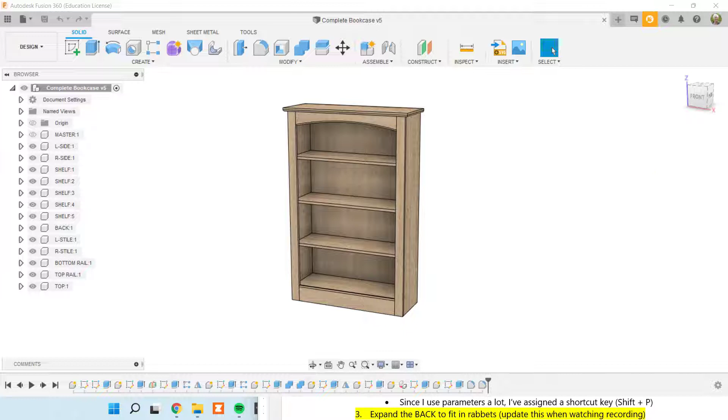So I've opened up the finished project here to demonstrate what we're going to be creating. This was based on our basic bookcase, but what we're going to do in this video is add two of these vertical members called stiles. We're going to add two horizontal trim pieces called rails, and a top. And you can see that the top has a nice round over to it. It's flush to the back. The top rail also has a nice round over to it, as well as the bottom rail.

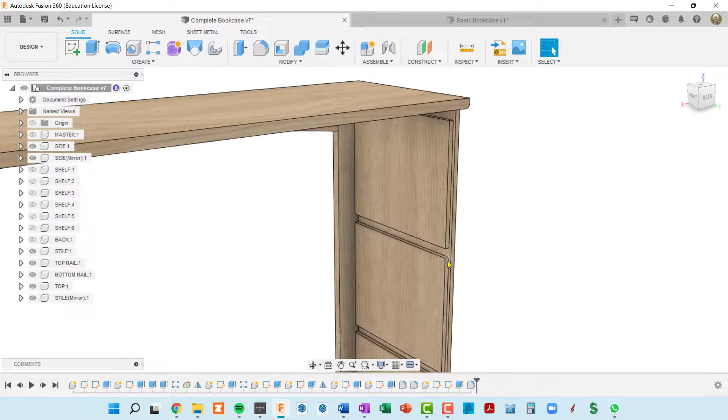So that dresses up our basic bookcase, but another thing we're going to add is joinery. If I hide all of the shelves here, you can see that there are dados cut in the side panels to accommodate the shelves. And if I hide the back component, you'll also see that there's a rabbet cut on the edge here so that the back piece will sit in flush with the back of the cabinet.

So we're going to start by opening up the basic bookcase from the previous video, and here it is. You can see it is pretty basic. If I hide any of these shelves, you can see that there's no joinery. The shelves are just butted into the side and butted into the back. The sides have no joinery for the back, so very basic. But we're going to add that joinery in, and we're also going to add these trim pieces and a top.

So let's just confirm that we still have a correctly functioning parametric bookcase. I'm going to press Shift-P to pop up my parameters dialog box. Just to review, if you go to Modify, Change Parameters, you will pop up the dialog box. But I've set this to Shift-P. If you want to do the same thing, click on these three vertical dots, a little menu will pop up, go to change keyboard shortcut, type the keyboard combination you want and press OK. I like to use Shift along with a single letter. It usually does not collide with Fusion's built-in shortcuts.

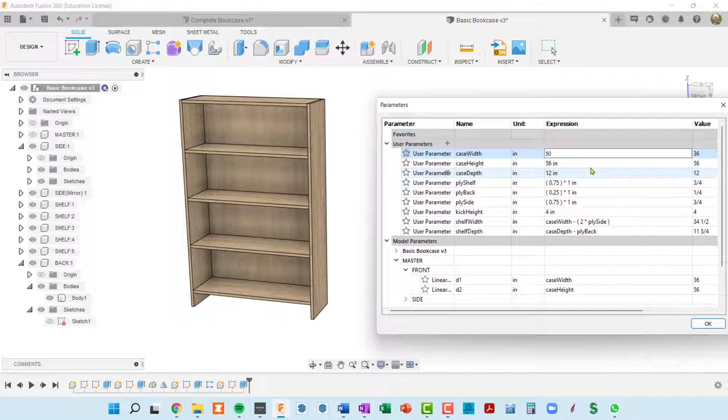Okay, so we're in the parameters, and these three, remember, were the case width, height, and depth, basically the overall outside dimensions of the case. I'm going to type in 50 for the case width, press enter, and you can see that all of the shelves got wider, the back got wider. For the height, I'll type in 80 and press enter. The height changed, and the shelves change their position. They're still equally spaced. And if we change the depth to 18 inches, the bookcase got deeper. Okay, so we're in good shape. I'm going to set those back to the proportions we started with, 36, 56, and 12.

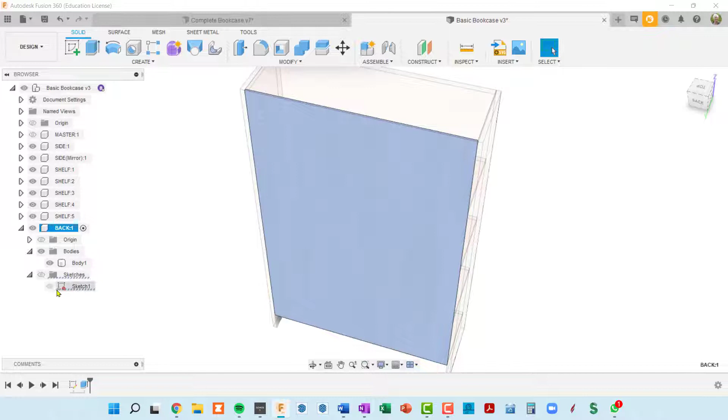So next I'm going to cut two rabbets, one on each side, to accept the back. I think the easiest way to do this is expand the back in width and then use the back as a cutting tool to cut into each of these two sides. If we want to change the size of anything that we've extruded, we want to go back to the sketch that defines it and change the dimensions of that sketch. So I'm going to activate our back component, open it up, and go down to our sketches.

I'm going to turn on our sketches and take a look at what we've got. If we hide the body, we can now see the sketch as this black outline. And there's also a black point right here. That is where the sketch is basically anchored down. We specifically anchored it to the inside back edge of the side piece of the bookcase.

So we're going to have to change that because we want this back to overlap 50%, half of the plywood thickness. And we want to change the width of it. So we found its sketch right here. We're going to right click on that sketch and then edit. And so now we see how the sketch was defined.

There are 2 dimensions. I'm just going to click on that and neaten it up a little bit. But let's hover over this and we can see how this is defined. This was defined as case width minus 2 times the side ply thickness. So basically the case width, which is 36 right now, minus twice the plywood, so minus 1.5 inches. That gives us our 34.5 with our current setting.

But since this has an FX, it's a formula. When we change any of those parameters involved in our parameters dialog box, the sketch will automatically change and thereby change the 3D body. The height is going to stay the same. The height is going to be our case height minus the kick height. So our kick height is this distance up to the first shelf. So that's fine, but this dimension is going to have to change.

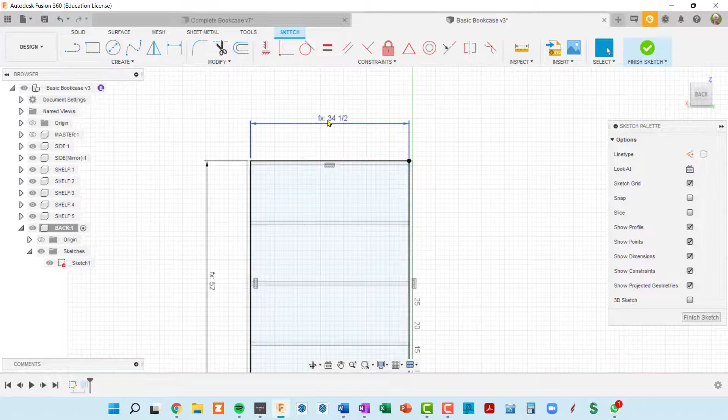Now, if we look at the sketch, we can see that it's all black. And if I try to move any piece of this, or if I double click to get the entire rectangle and try to move it, I can't. So how do I get it over to this point right here? That's the question. Well, the reason that this dot is black is it has coincident constraints. So when I hover over that dot, you'll see these 2 little icons appear.

If you don't know what these constraints are in a sketch, just click on that and look in the lower right corner and it says coincident constraint. Now there's 2 of them here because I think we've got 2 lines that each have an endpoint that coincide, and then there's a second coincidence saying those 2 points also coincide with the inside top of this side piece. So we want to get rid of that coincidence because that is preventing us from moving this sketch around.

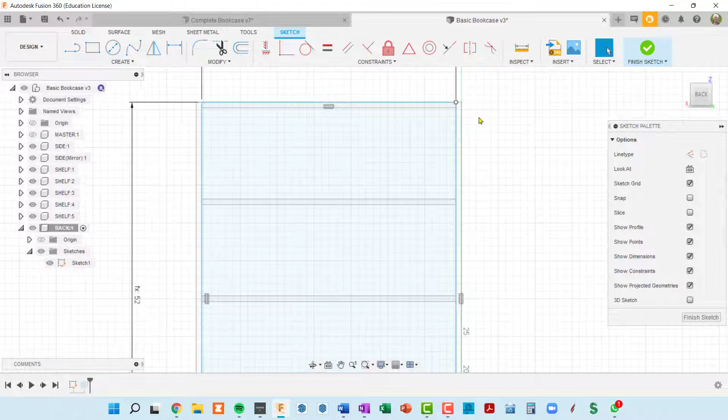So if I right click on this line or right click on this line, either one, I can go down to the pop-up menu and select delete coincidence. Let me do that again over here, delete coincidence. So I did it actually on both lines. And now when I hover over this point, there is no coincidence.

So now what's going to happen if I double click on this, selecting the entire rectangle, and start to move it? Well, something weird is kind of happening here. I can only move it in a certain direction, kind of spinning around this point. And that's because I have a dimension set from this point to this other edge. So basically we want to get rid of that point and we want to get rid of this dimension. We're going to redo this width anyway.

So I'm going to click on that dimension and hit my delete key. And I'm also going to get rid of this point. So I'm going to drag through it from left to right. The point gets highlighted, I press delete, and that's gone. So now I can double click on this rectangle and move it around. Now I want to show you that I've also lost the coincidence between these 2 lines. So if I just drag one of these lines, it's going to move away from the first point.

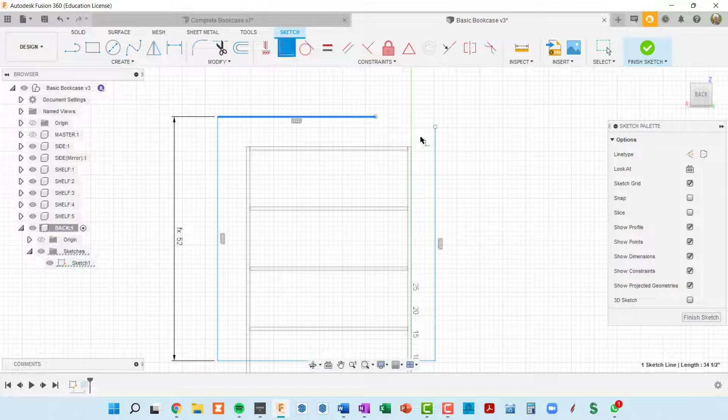So let's go ahead and reestablish a coincidence between these 2 points. So I'm going to use my coincident constraint here. And I'm going to click on one point and then click on the second point. That didn't work, so I'm going to click the second point first. There we go. And then the first one. Sometimes it's a matter of getting the order correct.

So now you're seeing that the width is really nowhere near what it was before, but we still have a correct height. And if you notice closely on the cursor, I'm still in the coincident constraint mode. So I'm going to hit escape. My pointer goes back to the standard pointer.

And now I want to put a dimension on the top of this rectangle. It's actually going to be the width. So I hit D for dimension and click on this line and then move away from it. Click again, and now I can enter my dimension.

So we know that this is going to be less than case width, and we know that we want this plywood back to be inset halfway into each side. So that's really, half a side plus half a side equals the thickness of one side.

So if we type in case, and then we can pick case width out of our parameters, and then say minus, and then type in ply, and we've got our ply side, which is the thickness of our side, and then press enter. So now we get 35.25, and knowing that this is 36, that sounds right, in that if we add 3/4 of an inch, our current plywood thickness, we'd get 36. We'd get the full case width.

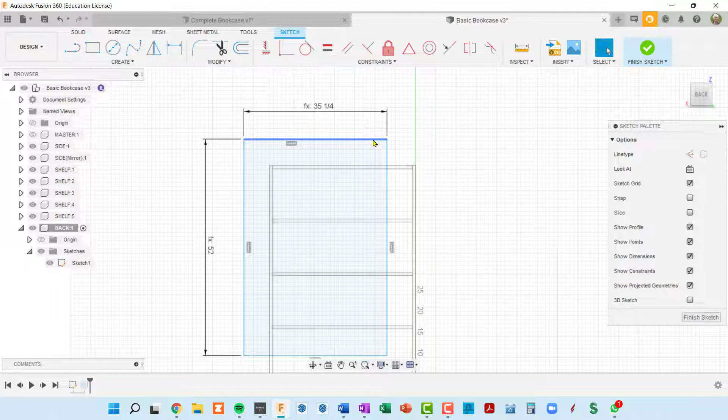Okay, so now I'm in dimension mode, so I'm going to hit escape. I can click on any of these lines and move this entire rectangle. Or I can click on this point and move it. So where I want to position this is actually halfway on this line. And when I try to do that, oh, I actually can snap. I thought I couldn't, but this is good.

So I'm moving this point, and you can see a little triangle pops up. That's a midpoint constraint. I'll move away from there and zoom in a little bit more so you can see it. So when I drag this point, hover over this line, I've got my left mouse down so I can continue to drag. When I see that midpoint constraint, I can just release.

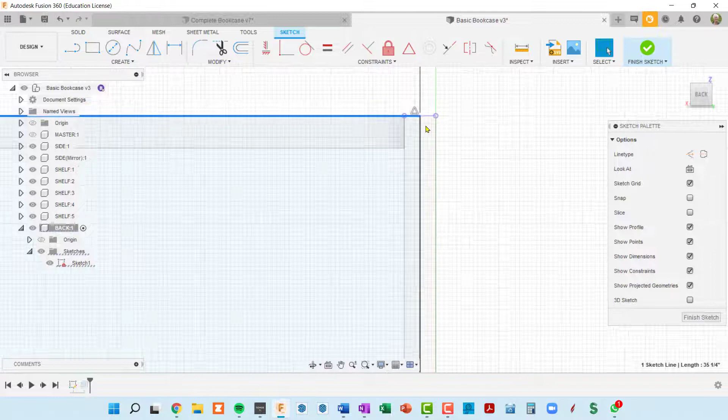And now, magically, all of the lines in this sketch just went black, which means this sketch again is fully constrained, which is what we want. Now if I try to move it, I can't. So it is coincident with the midpoint of the side piece of plywood. So now that's going to define the new size of our back. So all I have to do is finish the sketch, which I can do here or here.

Now let us take a look at the body that we had previously hidden. I'm going to turn it back on. And now you can see that the plywood back extends half into the plywood side and half into the other plywood side. So that's perfect.

So we're going to hide our back sketches, collapse our back component up, and now let's go to the top level component, deselect everything, and now we can see, well, the back is the proper size, but the two sides do not have a rabbet. They do not have a groove to accept the new size of the back. So we can actually use components as cutting tools in Fusion. So that's very convenient. That is actually part of the combine command.

So if I go to the modify menu and I pick combine, I get this dialog box that's asking me, what is your target body? So basically it's saying, what do you want to cut? So I'm going to hover over this side and click there, and it shows as one selected. Then my blue selection goes to the next thing in the dialog box, and it's saying, what are your tool bodies? So in this case, we're going to use this back as the tool, and it's going to cut into the side. So I'm going to click on the back.

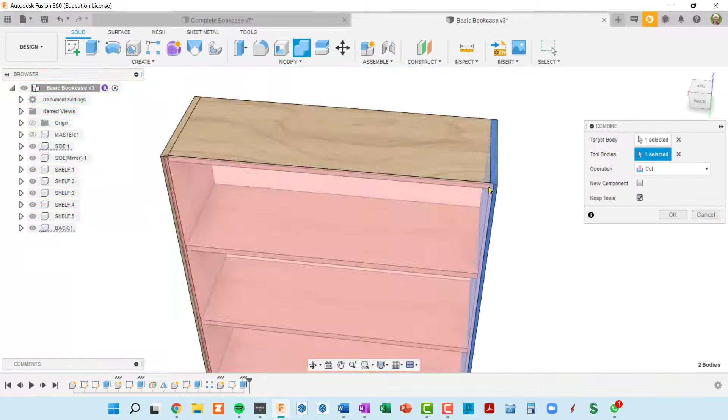I want to make sure I'm in cut mode. And this check mark is very important. It says keep tools. Well, our tool is our back. If I didn't have this checked, this back component would go away. It would actually delete as part of this operation. So we're seeing a preview. The red is representing where it's cutting, and it's actually cutting into this side. So I'm going to click on OK.

And now you can see we don't have that overlap anymore. And if I hide the back component and show the back component, you can see that there's a rabbet cut that this fits perfectly into. Now, we have to do the same on the other side. So you can actually repeat the last command in Fusion by right-clicking, and then repeat whatever the command is will be right here. So I'm going to pick combine.

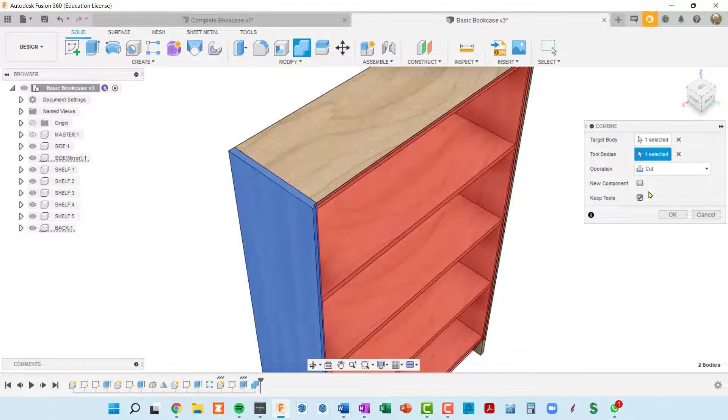I get my combine dialog box up again. Now I'm going to select my new target body, which is this side. I click there. My tool body is the same. It's this back. So I click there. I want to make sure I'm in cut mode and keep tools and OK. And now I have cut that other side rabbet.

So now when we hide the back, you can see we have a rabbet going all the way down to the end here. It didn't go farther because that was the height of our back. So that was cut perfectly by Fusion.

Next, we're going to make the dados to hold the shelves. To do that, we'll start by making one dado in one of the sides and then use a rectangular pattern to reproduce that dado for all of the shelves. And then we're going to do all of that work so it gets mirrored to the other side.

So I'm going to turn the back component back on, and remember that we have two sides here and that they are mirrored. We have side one and another one that says side one mirror. I'm going to click on that side one mirror and rename it R-side for right side, and then do the same for the other side and call that the left side, L-side. So now we know those are really two unique components.

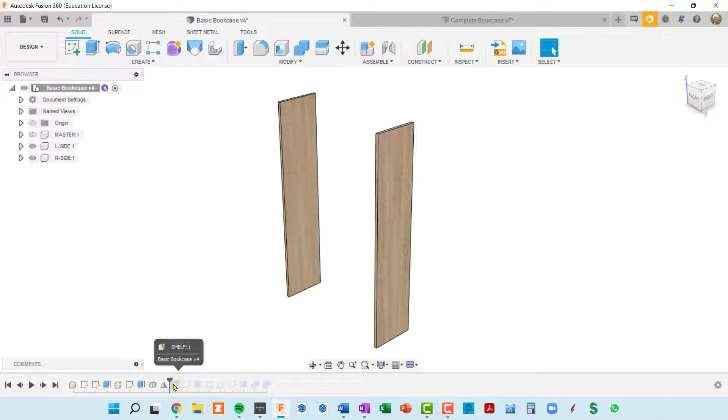It created the second side. So if we go back in time before that second side got created and work on this side component, for instance cutting the dados, then those dados will automatically appear on the other side. So let's leave our timeline in the proper position here, and then we can activate our left side and start working on it.

I'm going to open up this left side component in the browser, and I can see I have a single sketch and that it's hidden. So I'll unhide that and just hide the bodies so I can see the sketch. The sketch is basically the outline of the entire piece. So I'm going to make another sketch, and I'll actually make it on the inside here so we can extrude inward and cut the dado.

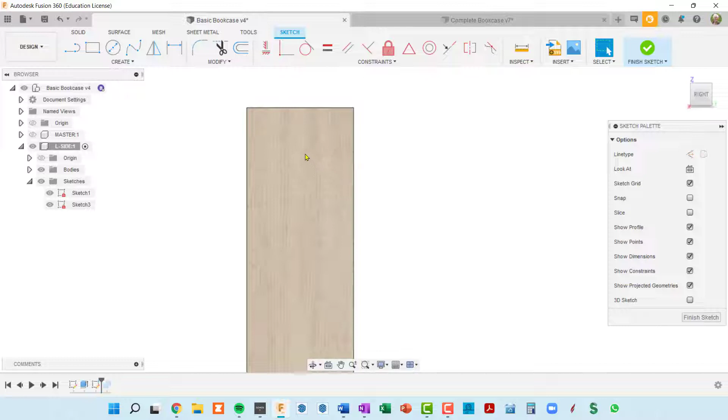So I'm going to go up to Create Sketch. I'm going to click on the inside of this left shelf. Fusion's going to pan so that we're looking straight at it. And now I'm going to get my rectangle tool, so I can either press R or click on the 2-point rectangle here on the toolbar.

I'm going to purposely snap to the upper left corner here and click, then move down towards the lower right corner. Instead of actually snapping to this right corner—you'll see that I'll get a dimension of 12—I don't want it to snap there because that's going to make a coincidence. So I'm actually going to make sort of a temporary rectangle somewhere in between and click. It's not the proper height and it's not the proper width, but it doesn't have a coincidence here.

So I'll show you that. If I hit escape, I'm back in my regular selection here, and I can drag this line this way and drag this line this way, but I cannot drag either of these, the left or top line, because they are coincident to the upper left corner because I intersected that corner when starting to draw the rectangle.

And in fact, as I hover over this point, you will see—if I actually click on the point—you'll see these two coincident constraints being shown on the screen, basically saying the point of this line is coincident with the end point of that line, and both of those points are coincident to the corner of this shelf.

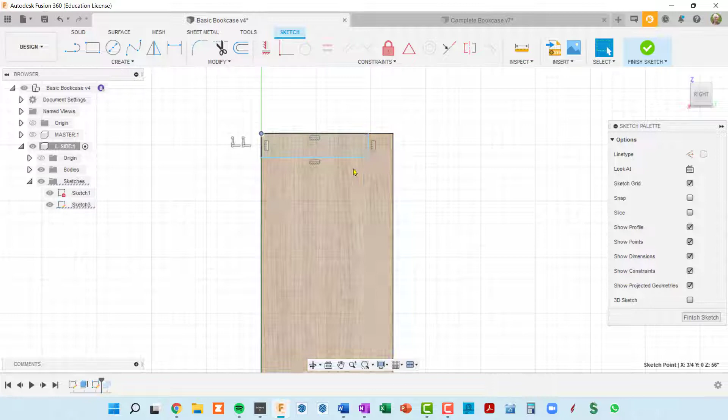So that's good. As this shelf grows, when we change our parameters, it's based here and then it'll grow towards the right. So to finalize this sketch, we basically need to put two dimensions in.

I'm going to hit D for dimension and click on the bottom line—well, that's not the dimension I want. Let me hit escape. I'm going to click on this line, press D, and drag down. Okay, so there's the dimension I want. I can bring it up here so you can see it a little bit easier.

And click. Now, we know that this shelf is the full depth of our case, so I'm going to say okay, we're going to start with case depth, which is our parameter. I can just start typing in case D, and Fusion shows me all of the parameters that match that. I'm going to click on case depth.

But I don't want to go all the way here. I want to stop this dado before we hit the back. So the thickness of our back piece is going to be subtracted from our overall width, and that's our ply back. I typed in ply, I get three of these ply parameters. I'm going to click on ply back and then press enter. It takes Fusion a second, but it calculated that.

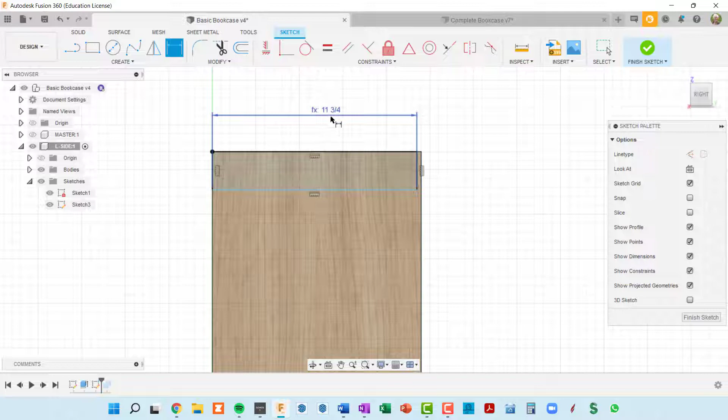So currently our case depth is 12 inches. It subtracted the current back thickness, which was a quarter inch, and we get 11 3/4. But the FX is showing that it's a function, and this will change when we change our parameters. So that's exactly what we want.

So now I want to put a vertical dimension on either of these lines. I'm going to press D for dimension, click on this line, drag it out to the side, click again, and now I'm going to type in—this is a plywood thickness, and this is a shelf—so I'm going to type in ply, and then click on shelf, and press enter. Okay, so that's all we need.

That is a closed profile that we will be able to cut into that piece. So I'm going to finish my sketch, and let's see, when we hover over this, if I zoom in enough, you can see I've got a profile that I can actually extrude.

So if I go up to my extrude command, hover over this profile and click, now the arrow is pointing back towards me and I want to go in the opposite direction. So I realize that when I type in a value here for the distance, it's going to be a negative value. So if I start pushing this backward, Fusion is smart enough to say okay, you're cutting this surface—it automatically set this operation for us. But if not, you want to make sure that's set to cut.

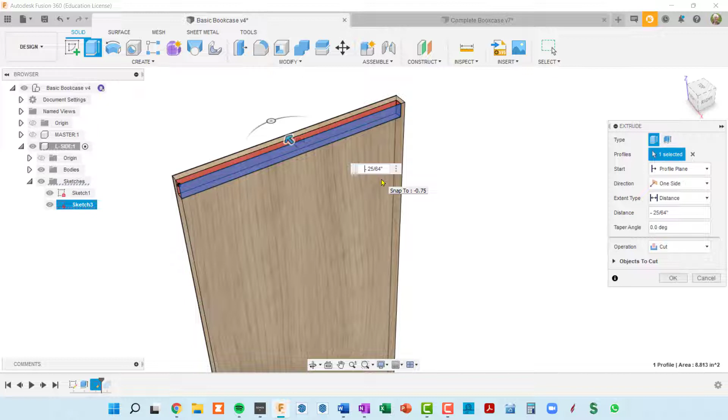Now I want to type in a distance, and the distance that I want for these dados is half the thickness of the piece of plywood that we're cutting into. So I'm going to type in minus and then ply side, and then get rid of this extra dimension that was in there. So my thickness is minus ply side—well, that's the entire thickness, and I want half of that. So I'm going to type in a slash, which means divide, and then 2.

So now we're looking at our preview. That cut is half the thickness of the side, the thickness of the plywood side. So that looks good, I'm going to press enter, and that finalized our extrusion.

Now this little piece right here is going to get cut by the operation we already did, but it's not there because we went back in time so that we could get all of these dados mirrored. So don't worry about that—that should handle itself. Once we scrub the timeline back to the end, this part will get cut, and it will get cut to the same depth as the dado is.

Okay, so now I think what we should do is make sure that dado is appearing on the other side. But remember, we're back in time, so let's go back to activating our top component, and I'll just click away here, and let's see where we are on the overall timeline. We are before the mirror command. So if I just scrub this one to the right, you'll see that the mirrored component is created and it has a dado in it.

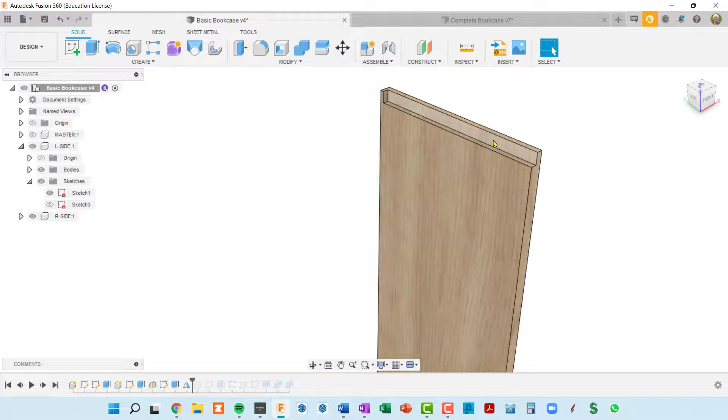So that's the trick: go back before the mirrored piece was created, and it will have everything in it that the original piece has. Let's rewind the timeline, because now we're going to reproduce this dado and make one for each shelf.

We could change that sketch and put dados in all the way along here, but there's a much easier way. We could create a rectangular pattern within the sketch, going back and editing it so each rectangle representing a dado patterns down the piece. But there's actually a better way still.

We're going to go to Create, down to Pattern, and pick Rectangular Pattern. The interesting thing is you can use features here. In this case our extrusion is the feature, so we're creating a pattern of features, not faces, bodies, or components, in order to reproduce our dado.

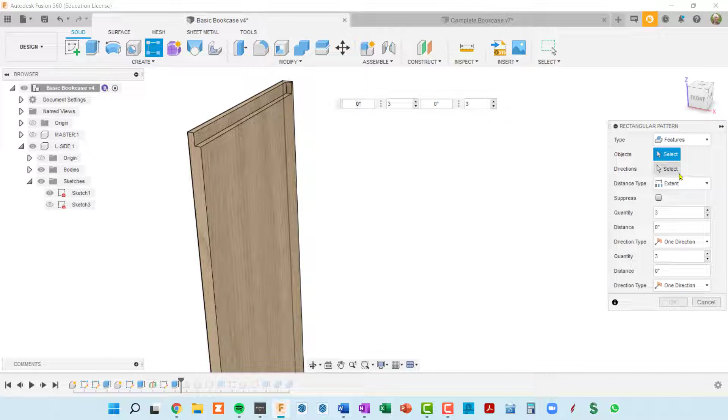Now it's asking us to select the object we want to reproduce—that's this feature in the timeline, so I'll click on it. Then we need the direction to move in, which is down the length of this side piece. I'll click on direction in the dialog box, then click any line going in that direction—doesn't matter which one, it's just establishing a direction.

Now it's downward, which is great. We know we have 4 shelves plus the top shelf, so really 5 shelves total. I'll put 5 in here, which also appears in the quantity field.

Then we need to select a distance type. There are two settings: spacing, where we'd set a distance between shelves, or extent. We want extent, because we want the 5 shelves to go down to our kick plate and evenly space themselves. So we're in extent, and our quantity is set.

Now we just need to establish the distance we're moving. As I drag this down, you'll see the 5 dados—the first one and the new 4—being reproduced. But we have to establish the overall distance to drive this bottom dado down, and that's what this number represents here, and the same number over here.

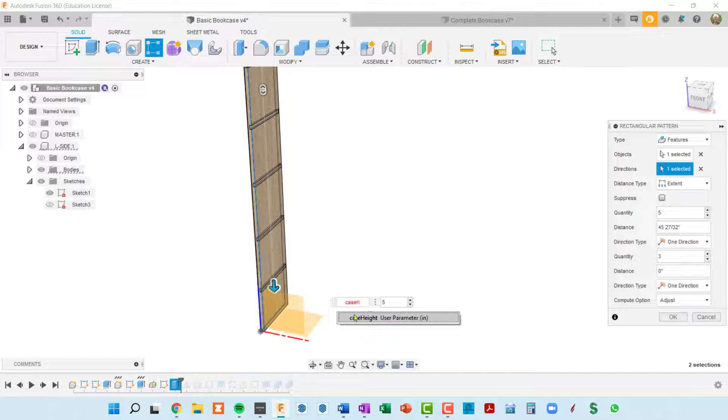So if we type in our case height—there's our parameter, so I can just click on it—we're just previewing here, I haven't hit OK yet, but you can see where the last dado appears. And it actually appears beyond the shelf, so that's obviously too much.

So we want to subtract the kick height from that. Here's the kick height—I'll click on it and see if that's proper. I'll press enter, knowing we can always come back to this rectangular pattern feature and edit it. If I click on this line and look in the lower corner, I get 3 1/4.

Now let's pop up our parameters with Shift P and see what our kick is set to. Our kick height is set to 4 inches currently. So we want that dado to come up by 3/4 of an inch, which is the thickness of the shelf—so we need to also subtract the thickness of the shelf.

So I'll go down to our rectangular pattern in the timeline, right click, edit the feature, and go to our distance calculation. Let me expand this dialog box so you can see the entire formula. Case height brought us down beyond the case, kick height brought us back by our kick dimension, but we also need to come backwards by the plywood thickness of a shelf. So the entire distance calculation is case height minus kick height minus the thickness of the shelf.

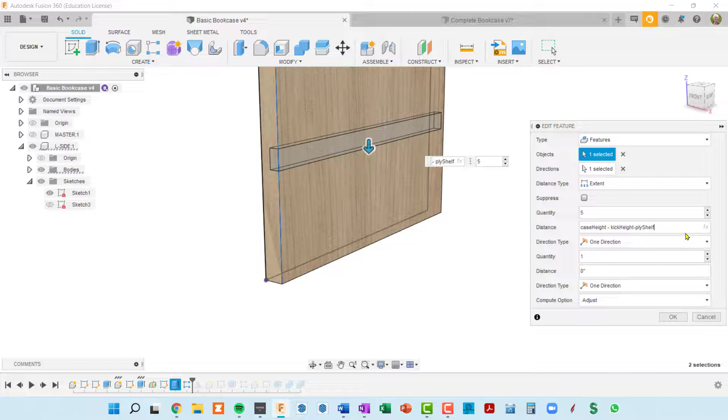If I press enter now and OK in this dialog box, let's measure this again. I'll click on this, and now it says 4 inches, which is indeed our kick height. That's perfect, and it should match where our shelves were reproduced. We want to check that, and also check that all of these dados got into our mirrored side.

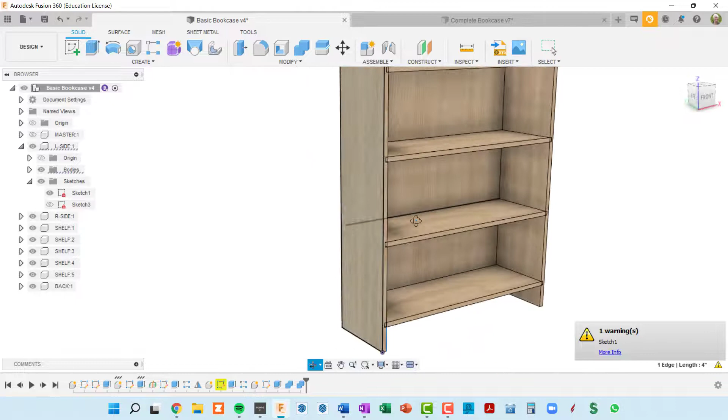So we can scrub the timeline to the right, and the mirrored component is now created, and it has all of the dados in it. Let's scrub our timeline all the way to the right, and we can see that our shelves are now created, and they do align to our dados perfectly, but the shelves are not wide enough because the shelves originally just butted into the two sides, and now we want to extend the shelves. So that's the next thing we'll do.

You may have noticed a warning popping up here in the lower right corner of the screen, and that corresponds to this yellow highlight of the sketch here in our timeline. So if I right click on that sketch, I can actually review the warning, and it says project reference failure, a project source is lost, cache used.

So what does that mean? Well, you can see actually a red dot here, and that red dot corresponds to what this projection warning is talking about. Basically, when we were positioning these shelves, we were positioning that on this inner line here and this line where those two lines intersect, which is no longer there because we cut away this dado.

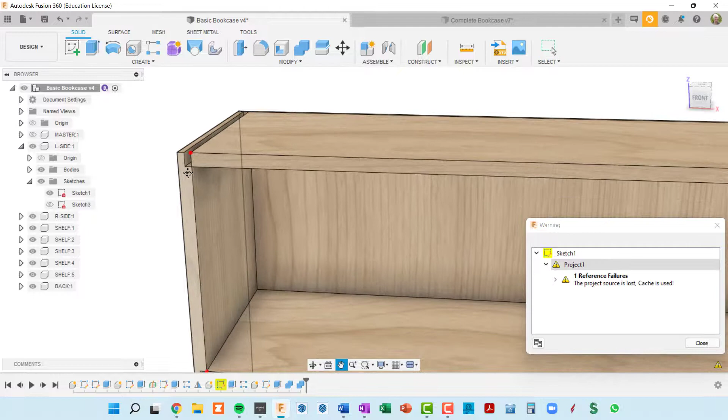So it's saying, well, you want your shelf to start at this point, but that point doesn't exist in the model anymore. So it's still working because it's using its built-in cache, knowing that this point used to exist. So it's a warning. We wouldn't technically have to fix it, but I like to fix those warnings because sometimes they do affect your model.

But it's also convenient that this is the next thing we need to do. We need to edit that shelf sketch and make those shelves wider. So we'll do both at the same time.

So this is our sketch. I can either get into it by right-clicking here and saying Edit Sketch, or going to one of the shelves. And remember, these shelves are all identical copies, so if I change any of these, they're all going to change. So I'll go into the first one, activate it, open it up in the browser, open up the sketches, turn the sketches on so that they're visible.

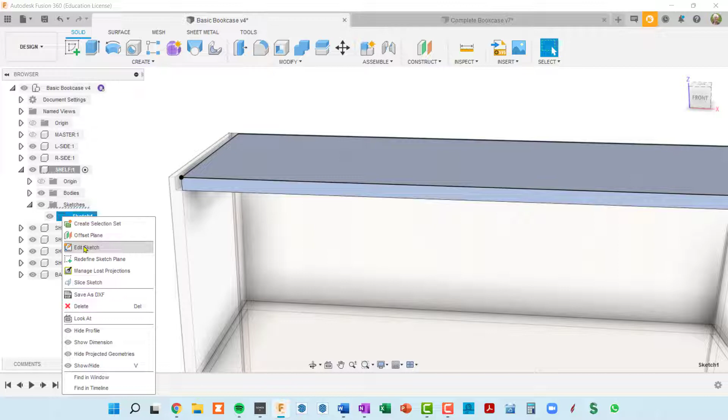Now technically I don't need to do that. If I right click and edit the sketch, it will become visible automatically. But I like to do it just to see beforehand, where does that sketch exist in 3D space? And you can see that it exists on the top of the shelf and that our extrusion pushed it down. You can also see where it is in relation to the side, and we need to change this sketch so that it now intersects with the corner of our dado.

So I'm going to right click on the sketch and go to Edit Sketch. And now let's take a look at it. First thing we notice is that all of the lines in the sketch are black, which means if I tried to move any of it, it won't move. And we can also see our side pieces here.

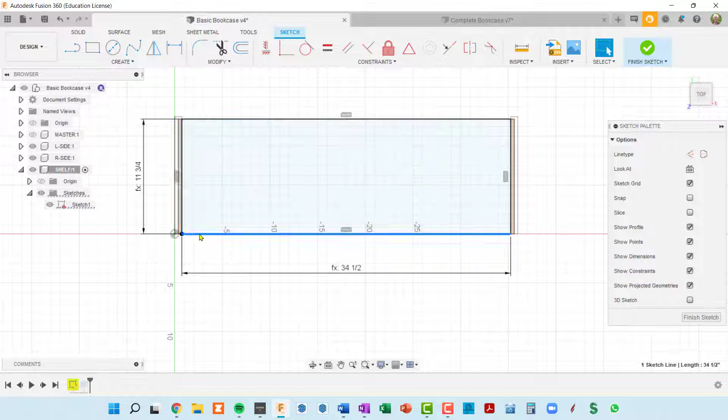All right, and we know that this is actually the dado, and we see a black point here with a couple of coincidences on it. So the two coincidences again will mean that the endpoint of this side is coincident with the endpoint of that side, and both of those are coincident with this point in space that's no longer there.

Let me go into 3D to show you that point in space that doesn't exist anymore. So we need to do some cleanup here, remove our coincidences, and actually remove that point in space to fix that error. So let's right click on the line and go down to delete coincidence, and let's right click on this line and delete coincidence.

So now we can see that our rectangle is blue, and if I double click on any of the lines in the rectangle, I still can't move it. And the reason for that is it's kind of locked to this projection point. So if I simply delete this dimension, I think we're going to be able to move the rectangle now.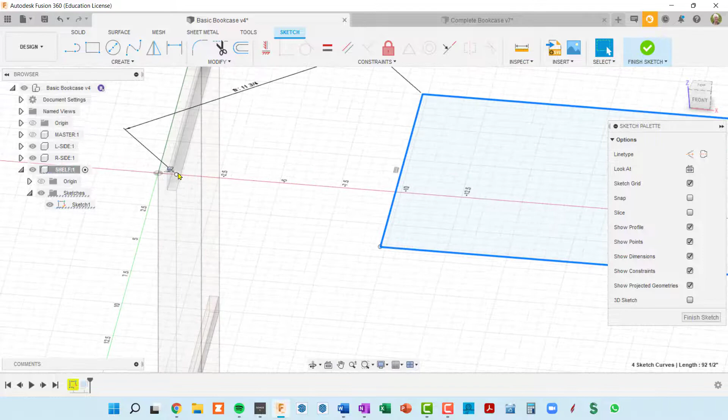So I'm going to double click to select all sides of the rectangle, and you see we can move it, but it's still linked to this dimension here, this projection point. So I'm going to remove this dimension. And this is the thing that's causing the error, this yellow projection point.

So I'm going to click on that and delete that. Okay, so now let's see if we can move this guy freely. And we can. So that's nice. And we're going to actually try to put it back here.

But before we do that, realize that the purpose of getting in here was to make this shelf wider. So we're going to change the dimensions. We're going to redimension this. Let's go ahead and look at it straight on the top. And let's put our two dimensions in. And then we're going to position the shelf back to where we need it.

Okay, so I'm going to hit D for dimension, and I'm going to click on this side. Now you see how two things are highlighted here? Because two things were highlighted, Fusion thinks that I want an angle between the two. So I'm going to actually click outside of here, make sure that nothing is highlighted, press D for dimension, click on this side, and then move out, click a second time.

Now this is our shelf depth. So this is the depth of the case less the thickness of the back. So I'm going to start typing in case, and here's our case depth, so I'll click on that, minus ply back, and press enter. So remember our case depth right now is 12, and the thickness of our back is 1/4 inch. So that's our 11 3/4.

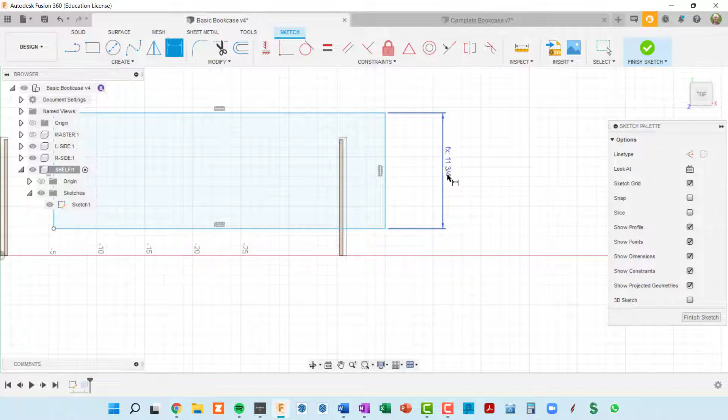But it's a function, so that means that when we change our parameters, that's going to update automatically, which is what we need for fully parametric design. Okay, so I'm still in the dimension tool. I can tell that because I've got a little horizontal double arrow next to my pointer. So I'm going to click on this line and then come up and click a second time.

Now this is the width of our shelf. So let's start with our case width, but it's not the full width of the case. It's into each of these plywood sides by half of the thickness of the plywood. So if we subtract 1 thickness of the plywood instead of 2, which is what it was before, we can get a proper width here. So I'm going to pick ply side and then press enter again.

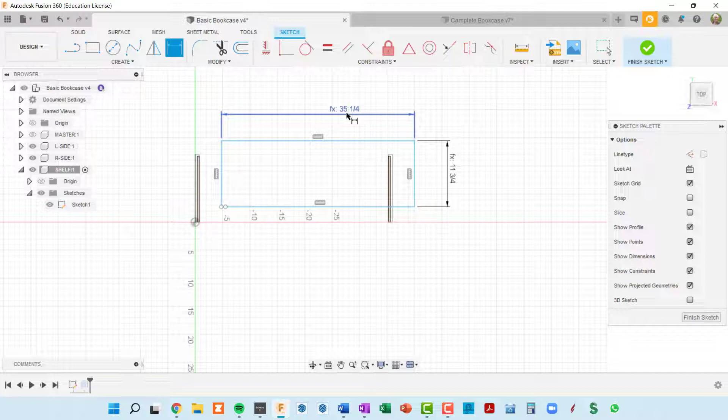So just doing a little calculation here, we know our plywood side thickness is 3/4 inch. We know our overall case was 36, so we're subtracting our 3/4 from 36 and we get 35 1/4. So I think our shelf sketch is now properly dimensioned, but I do see another issue here. Let me hit escape to get out of the dimension tool. When I hover over this, it's not a closed profile.

And the reason it's not is these 2 points do not coincide. This kind of got broken when we moved this sketch around. And remember, it was originally snapped to this point. So we're going to make this point coincident with this point. Now, when you have 2 points that can move, you click on the first one, that's the one that will not move. So there's a little saying, click to keep.

So if I go to my coincident, I'm going to do a click to keep. I don't want this point to move. And then I'm going to go to my second point, and it's going to move to the first point. So now when we hover over this, let me escape to get out of my coincident constraint tool, we have a closed profile. And that's what we need for the extrusion to work properly.

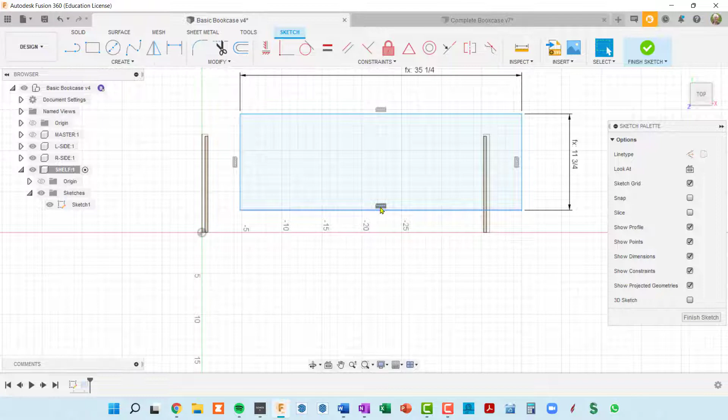So now we can double click here to select our entire rectangle. And what we want to do is make it coincident with this point. So let's drag this down and see if it will snap there. And I am not getting a proper snap there. So I'm going to zoom in on this, and I want to get this point right here into my sketch so that I can move from here to here.

Okay, so I'm going to use the project command. So I press P for project, and now zoom in on this side, and I actually want this corner, after our dado is cut, and I just want the point. So I'm going to click on that point, and it's not finalized yet. The project dialog box is saying you've got one point selected. Is that what you want? And I'm going to say yes. And now I can do that same coincident constraint and get this rectangle to automatically move to this projected point. So that's the one I want to keep.

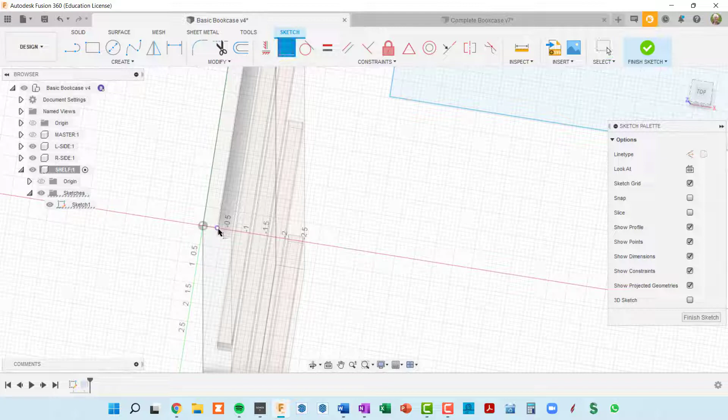I don't think that's going to move anyway, so the order of selection really doesn't matter, but I like to stay in that habit of click to keep. So I'm going to go to coincident. This is the point that I don't want to move. This is the point that I do want to move.

And now a couple things happened. The entire rectangle moved to this point, which is great, and it all turned black. So it is fully locked in. It is fully defined. It has its dimensions and it has its point in space. So it turned black. So if I hit escape to get out of my coincident tool, I cannot move this rectangle without removing coincidences or dimensions.

Okay, so everything is in the right spot. We are not going to extrude again because that command already exists. We're just going to finish our sketch. And when we finish our sketch, you can see that Fusion replayed all of the commands and pushed this shelf down, and it fits perfectly.

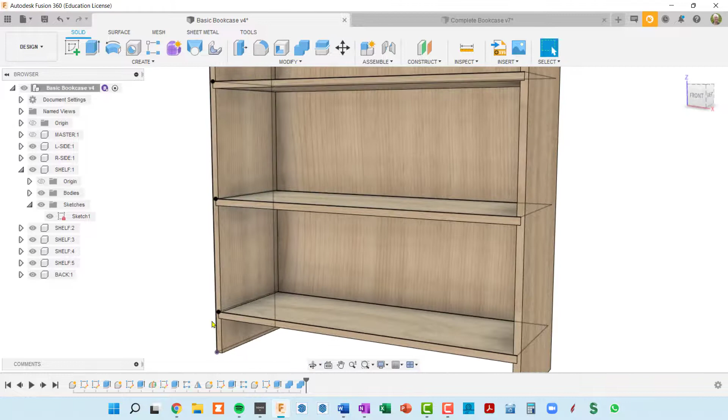Now, the other thing that happened here is that all of the shelves got resized because they are all identical copies to each other. So let's go up to the top level component, click outside to deselect. Now we still have some sketches left on. That's why it looks a little weird here. So let's go to our shelf component, turn the sketches off, collapse that down, click to remove the selection.

Now, looks like we still have a sketch visible. So I'm going to right click here and I'm going to find that sketch in browser. So now I guess I hid this sketch. I don't know what I did before, but I want to hide all of these sketches. Collapse this down. So now we have a good looking model that doesn't have any sketches to confuse us.

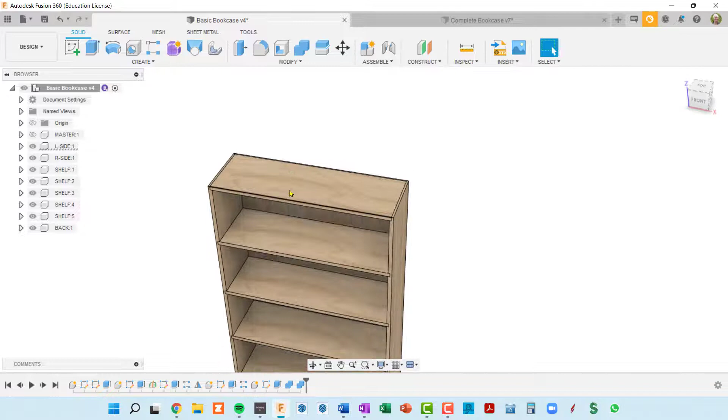And let's look. We've got the proper number of shelves. The shelf has been expanded. The shelf fits perfectly in the dado. And we only cut one dado and we only resized one shelf. And all of the rest of it happened automatically.

So next we're going to create the trim around the outside of the bookcase. And we'll start with the left vertical member or a stile. So first thing, we'll create a component, and we're going to call this component a stile, and press enter. Now, I should have said, make sure that the basic bookcase is selected so that it's at the same level as all of these others. Again, if I had selected like a side component and then made a component, it would be inside this side folder. So we don't want that.

We want to first select our top level component and then create our new component. But after you create it, it's automatically activated. So when we do a sketch, it'll automatically be within the stile folder. Now, we want to set up some parameters for the stile. So I'm going to press Shift P and then add a couple new parameters.

So the first one will be our stile width, and we're going to set that initially to, let's say, 2.5 inches, and I'll click enter, and then click on this little plus again for another parameter, and I'll type in stile depth, so basically the thickness of our stile, and let's set that to 3/4 of an inch, and I'll press enter there. So those are the two parameters we're going to use to define the stile. The stile is going to start at the bottom of the shell of the side piece and go all the way to the top. So that's going to be our case height.

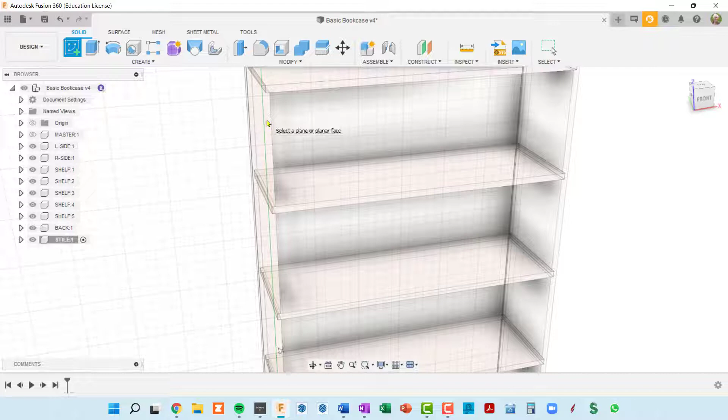All right, so we're in our stile component. We create a sketch, and now we select the plane that the sketch is going to be on, and I'm going to select the outside, the front side of the left side piece. So I click there. Fusion navigates to look straight at that. And now I just want to be careful that I get the very top here and go to the very bottom with my sketch. So I think the safest thing to do is start in the origin here with a 2-point rectangle. I'll click here and then move upward.

And I think what I'm going to do is I'm actually just going to use that as our coincident point, and then click here somewhere and use the same technique that we've got a rectangle. It's coincident to the bottom left. So when we change the height of this bookcase, this stile will always start there and then grow or shrink in height. So let's establish our dimension.

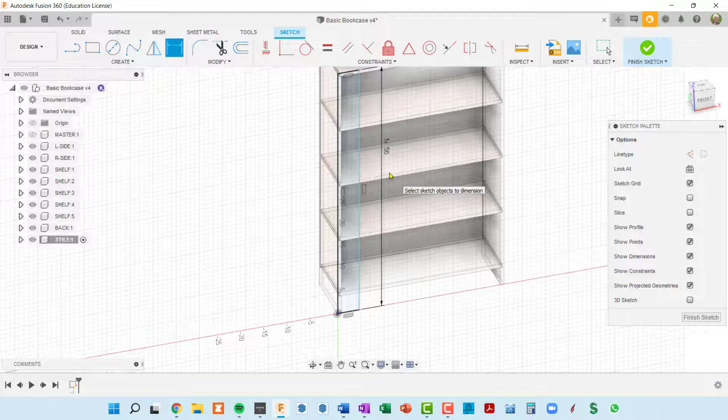So I'll press my D key to go into the dimension tool, and I'll click on this line and pull off to the side, and this is going to be our full case height. So I can select that out of our parameter list and press enter, and now one more dimension. So we're in the dimension tool already, so I'm going to click here, move upward, and oops, let me try that again. D for dimension, click here, move upward.

We're getting a little bit too much info here. Let me try it down on the bottom. Click. Well, first I got to get in dimension. There we go. Okay, so now we have a dimension. I'm going to click and I'm going to put our stile. I just typed in stile and I'll pick depth out of the list and press enter. So it's currently set at 3/4 of an inch, and our case height is currently set at 56. So our sketch is basically done.

Let's do a finish sketch. And now our sketch is still visible. Let me open up the stile folder in the browser and open up sketches. And you can see we have that one sketch and it is visible. So now I'm going to do my extrude. So I click on the extrude, and this sketch got automatically selected. And now I'm going to pull this back,

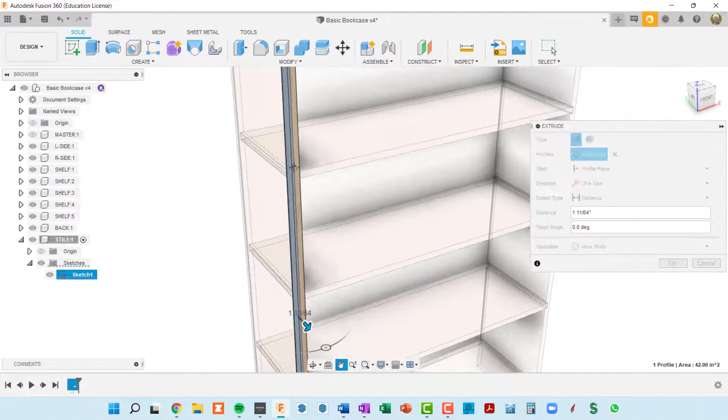and you know what, it looks like I did the wrong dimension, but let me finish our extrude, and then we'll go back in the sketch. Since it's all parametric, it will automatically re-extrude. So this is what we wanted for the stile depth. I should have picked width in the previous one. So this is our depth, and I'm going to press enter. So we now have 3/4 by 3/4, which is not what I wanted.

I want to go back into the sketch. So I'm going to right click and edit. Here's our sketch, and I'm going to change this dimension. Double click on it. This is our stile width, not our stile depth. Okay. So now that's 2.5. That's what we want. Okay, so I finished sketch, and you'll notice I didn't do an extrusion. That happened automatically because we had an extrusion here. So again, the power of parametric design. So we now have pretty much a finished stile here.

So I want to do one on the other side. I could make another component, but why not just mirror this one to the other side? And then if we end up doing something like a round over on this edge, it would get mirrored here if we do the round over before the mirror command occurs. So let's do our mirror. So we need something to mirror on.

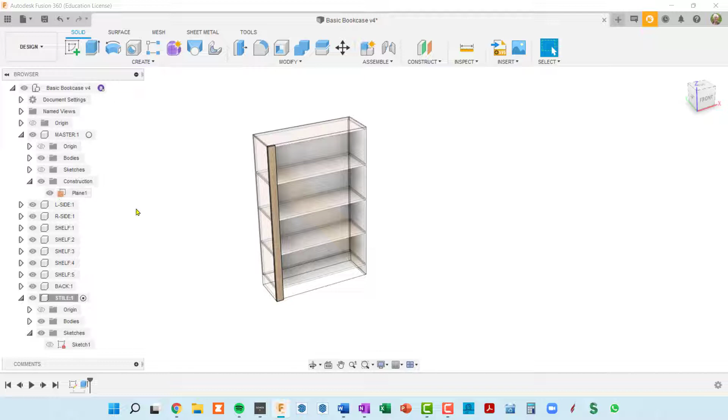And remember, we have this master component. And if I open up that master component, there is a construction plane inside there. It's a little hard to see here, but that's this faint yellow, and that is right in the middle, the horizontal middle of our cabinet. So this is going to be our mirroring plane. So we're in Stile as the current component. We want to go to Bookcase because we're going to end up creating a new Stile component that's a mirror

of our existing one. Okay, so we go to Create Mirror, and now the mirror dialog box is asking us, well, what do you want to mirror? We do want to mirror a component, and we want to select our object. So I'm going to go over to the browser and select my stile, and you can see it got selected on the screen. And now I click on mirror plane and select the plane. So that's our construction plane. And you can see we're getting a preview of the component being mirrored to the other side of the cabinet, which is perfect. So I'll click on OK.

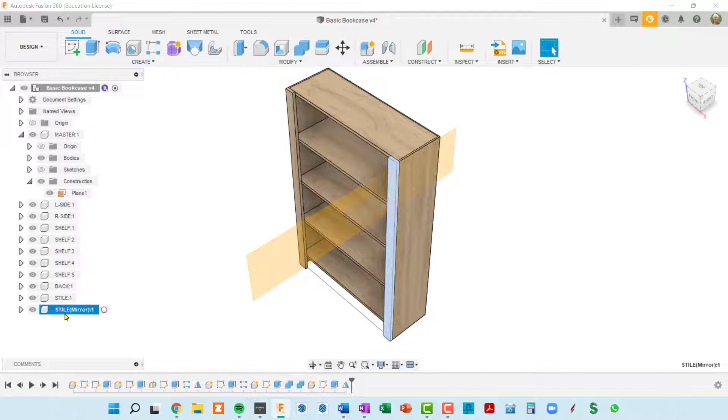So now within the browser, you'll see we have two stile components, one that says mirror. So these are not identical copies. They are identical right now, but if there was something on this side that was unique, it would be on this side. So it really is a mirrored version. So first off, I'm going to get rid of our mirroring plane. So I'm going to turn master off altogether, turn off its visibility. And now I'm going to rename both of these stiles because they are unique at this point.

So I'm going to click, wait a second, click a second time, and then I'm going to put an L in front of that one. So that's our left stile. And then I'm going to click, wait a second, click a second time, put an R in front of this, and get rid of this mirror. Okay. So we have our left stile. I can hide that and show that. And we have our right stile.

Next, let's create a trim piece on the bottom here called a rail. So very similar to stile, we'll first create a component, and I'm going to name this one bottom rail.

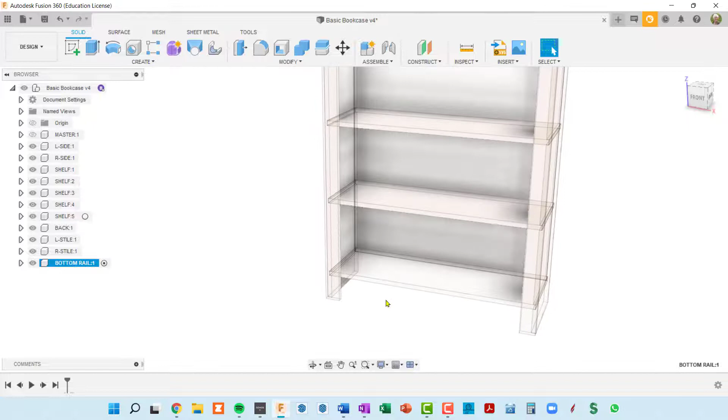And press enter. And I was fortunate that it went in the right spot. Again, I forgot to say you should always select your top level component first. Okay, so our bottom rail is created. It is activated, so we can create our sketch. Now, I'm not going to define any parameters for this bottom rail because we already have a kick height which goes up to the top of this first shelf, and that's what we want our bottom rail to do. And the width of the bottom rail will be defined parametrically between these two stiles.

Okay, so let's create our sketch. And we're going to use the front of this bottom shelf as our sketch plane. So I clicked on it. And these are our rails right here. So we actually want to start, I would say, at this point on the bottom rail and then come up. So if we get our rectangle tool, can we snap right there? And it doesn't look like we can.

So I'm going to hit escape and P for project. And now I'm going to hover over the point that I really want to snap to. Click on that and then do an OK. So that point has been projected from the 3D geometry in the model to our sketch plane. So now when I go to get my rectangle, I can snap to it. And now whenever this model is changed in size, this sketch is always going to start here and then adjust its width properly.

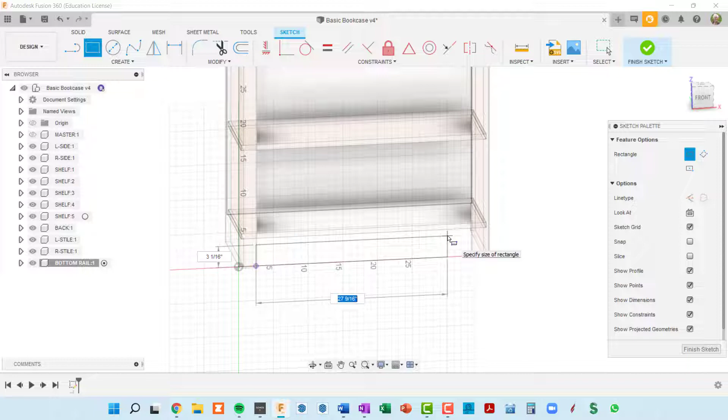Okay. So let's go ahead and just stop it short of where we want to be and put our dimensions in, and then we'll be all set. So I'm going to click it here and then hit the D key for dimension. I'll click on this bottom dimension, click a second time. Now we have to think about what this dimension is using our parameters. So we have our case width, which is the overall case size, and then we need to subtract something from that. Well, we also have our stile width, and we have two of those. So I'm going to subtract 2 times the stile width.

And let's see what we get. We can always change it if it's not right. So we get 31 inches, and it looks visually like it's proper. It's going all the way to this second stile. Let's think about it. We've got a 36-inch case width. We've got a 2.5-inch stile width. So 2 of those are 5. Subtract that from 36 and we get 31. So that appears to be the proper dimension there.

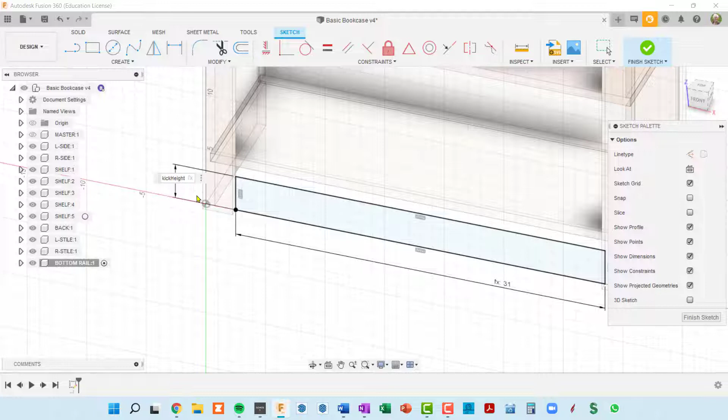Now the height is not right yet. So we're still in our dimension tool. So I can click either of these side vertical members in the sketch and pull off to the side and click. And now I think all we want to use is the kick height. And let's confirm that that takes us to the top of the shelf. So we can't really see that in a perspective view. Let's look straight on. Okay, so our kick height is not going up far enough. I want this kick plate to cover the front of this first shelf.

So I'm going to go back to this. I'm in dimension mode right now, so I'm going to hit escape, and I'm going to double click on this dimension. So it's kick height, and I'm going to add in the thickness of our shelf, which is ply shelf, and then press enter. So now visually it looks great, and our kick height took us to the bottom of the shelf, and then the shelf thickness was added to that, and that got us the height of our bottom rail. Okay, so I'm going to click Finish Sketch, and now we have something that we can extrude.

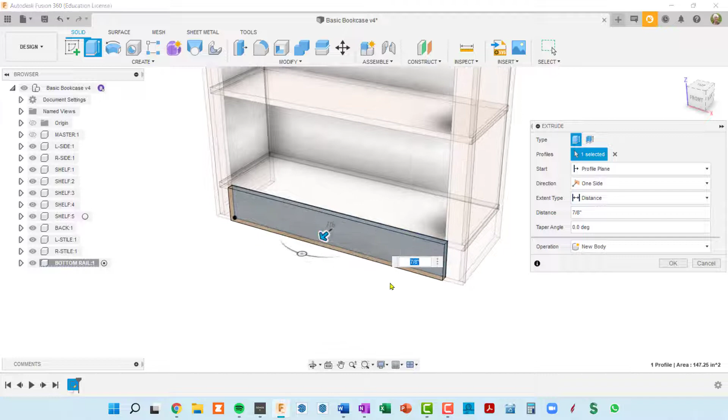We're in our bottom rail component, so our bodies that we're about to create are going to go in there. So I'm going to go up to Extrude, and the arrow is pointing towards us, so we're going to have a positive extrusion dimension. And we're going to type in, let's see, we have a stile depth. Even though this is a rail, we could use that.

I'm going to hit escape, so I got out of the extrusion, and I'm going to go into our parameters.

Instead of this being a stile depth, I'm going to click on that and rename it. This is our trim depth, which we'll use for our rails and stiles. Renaming here doesn't affect the usage, so it should still be in our stiles. The stile sketch or extrusion will use that trim depth now automatically.

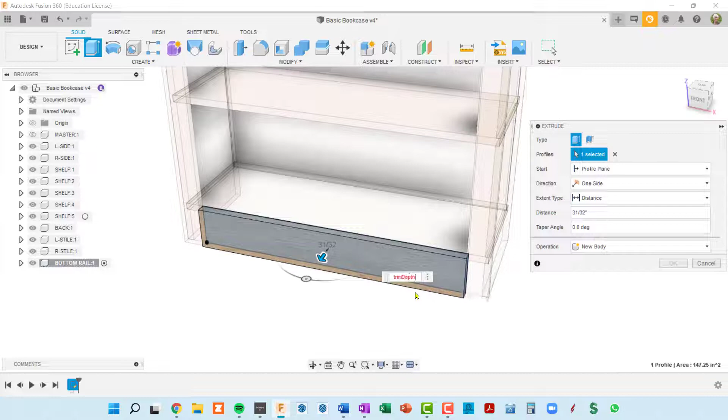I'm going to go back to extrude, pull it towards me, and then type in trim. I see trim depth, so I'll select that from the list and click. Now this rail is the same thickness as the two stiles, and it's the proper height.

So the last trim piece is going to be a top rail, and we're going to have an arch in the bottom of it. It's going to be defined very similar to this bottom rail, but with a couple of new things.

Same as before, we will create a component. We will name this component top rail. And here again, I forgot to activate my top level component.

Let's see if we can just move it at this point, since it's inside the bottom rail. I'm going to click on it and drag it up to Bookcase, and now it's at the same level as all of the other components. If you always observe what's happening in your browser, you can fix little issues like that.

So we have the top rail component activated. I'm going to go to Sketch, click on the front of this top shelf, and then orbit a little bit away from it.

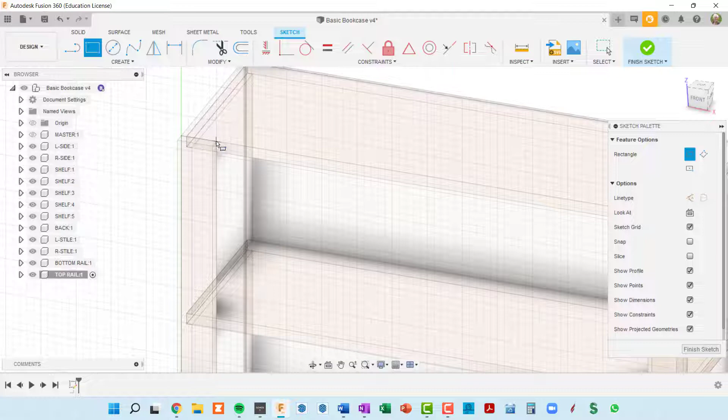We want to get our rectangle tool and make it coincident to this corner. Let's see if we can do it. Nope, there's nothing there to snap to, so we're going to have to do a projection of that point into our sketch.

We can do that while we're in the sketch. I'm going to press P for project and then hover over that point. It's red, so I'll click, and now one piece of geometry has been selected to be projected. I'll click OK and go back to the rectangle tool, and now I can snap on it, getting a coincident constraint to that point, so as the stiles change in width through our parameters, this rail will adjust properly.

Like before on the bottom rail, we're going to stop this rectangle before we get to the other side purposely. So I'm going to click here, and then we're going to enter dimensions in. D for dimension, click on the top piece of the rectangle, click again, and this is the same formula we used for the bottom rail length.

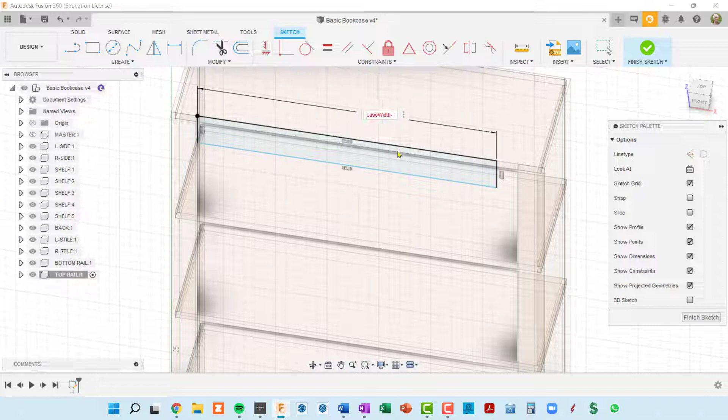We're going to say this is the case width minus 2 times the stile width, so that should take us right up to that other stile. I'm going to click enter, and let's take a look at it straight on. I'll click on front in the view cube, and that looks perfectly aligned.

I'm still in my dimension tool. I'm going to click on this vertical line, pull away, click a second time, and this is going to be... well, actually, have we defined anything for this? I think I did in a previous video, but let me go through and do that here.

I'm going to press Shift P, and let's see, I've got a trim depth. Okay, I have not defined anything, so I'm going to click on plus, and this is going to be our top rail width. Let's set that to, let's say, 4 inches initially.

Now we've got a parameter to set this dimension to. I'm going to double click on it, and now I'm going to type in top, and there's our top rail width coming out of our parameter list. I'll press enter, so that's initially set to 4. Now we want our arc.

We're going to use the 3-point arc, and basically the way that works, here it is right here, is you select a point here, and then a point in the middle that is going to define the radius of the arc.

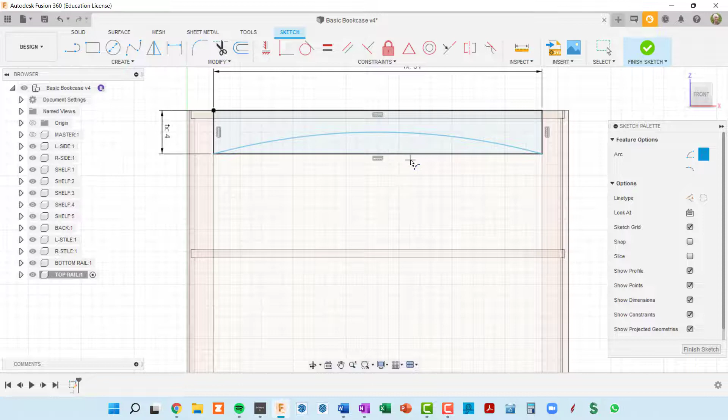So let me do this, and I'm going to show you that we're actually missing one piece of information. I want something here to define that height right there, and I don't have anything just yet. So let me undo out of that. I'm pressing Control Z, and I'm going to make a construction line.

I'm going to go to line, and in my sketch palette I can click on this construction button, and now this is geometry that's not going to allow us to extrude it. It's just for measuring purposes essentially. So as I hover over this top line, I can snap to my midpoint. You see there's a little triangle that pops up when I'm right at the midpoint. So I'm going to click there and then just come down, I don't care about the dimension just yet, click again, and click this check mark to get out of the line tool. So I've created a construction line, and now that's going to control where that arc is.

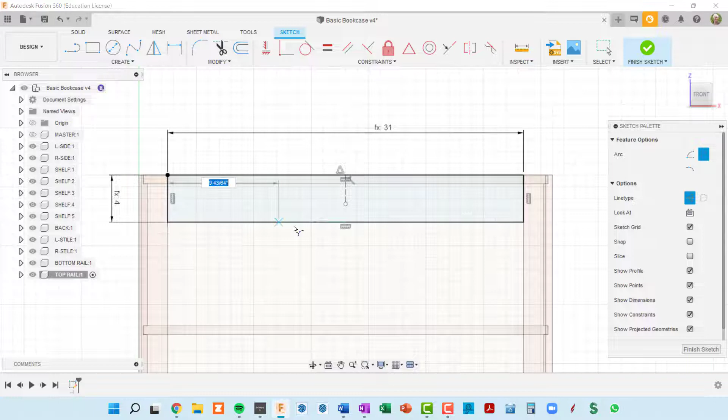Let's go ahead and make the arc first, and then we'll set the dimension, and you'll see that the arc will change. So I'm going to do a create arc, 3-point arc. I'm purposely snapping to this point and to this point, and then also to this construction point.

Now, since we were in construction mode, this line became construction. We want that to be an actual line. So I'm going to press escape, and I can either highlight it here and go over to my sketch palette and click on that, or there's also a shortcut key. I can click on this and press X. X will toggle any selected geometry between construction mode and real mode. So now we have a real geometric line there, and we have this construction line.

You see that the construction line is not causing any problems with the closed profile, so we'll be able to extrude this. But we also have a second profile here that we don't want. It's really not a problem, but let's get rid of that. There's a trim function, so I'm going to press T for trim, and whatever you hover over that goes red is what you can trim. So I'm going to trim that, and you see when we did that we lost half of our arc.

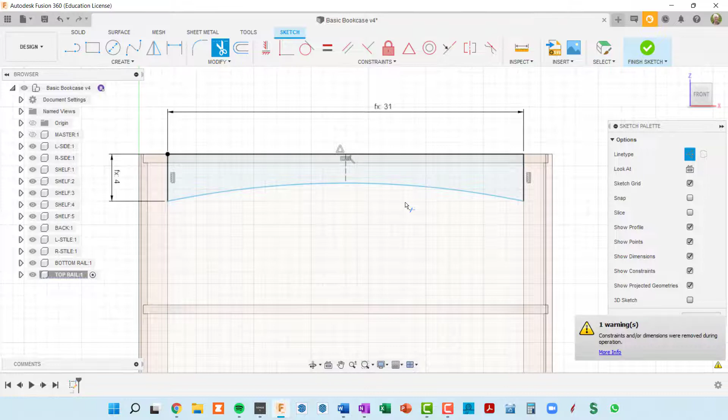So I'm going to undo that a couple of times and see what happened there. Let me try that again. Trim. Okay, that time it didn't. I'm not really sure why I lost half of that arc. I might have trimmed this side of the arc, but anyway. So there's our arc, and now can we control the arc with the dimension of this line?

So let's try it. I'm going to press D for dimension, click on this construction line, and now we want something parametric here. So we have a width of this rail, so top rail width. Let's say we want this to be 75% of the top rail width. So we can do top rail width times 0.75, and that looks a little tall. And the other problem is this side expanded more than that side.

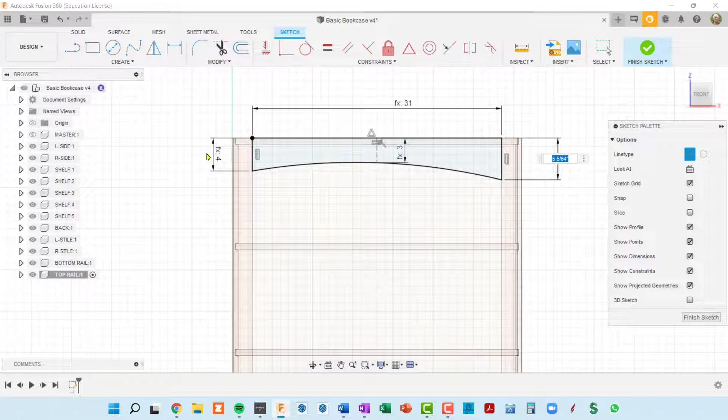So let's first fix a dimension here on this side. I'm going to hit D for dimension. I think what happened is when I deleted that bottom line, this changed from a rectangle to just a series of lines. This one was not defined. So I'm going to dimension this. I'm going to pull off, click, and now I can either type in my top rail width, or even easier, I can go over to where that top rail width exists, click on that, and that's going to be the exact same width.

Okay, so now we have a good looking arch here, but it doesn't really arch up enough for my taste. So I'm going to double click on this dimension and say, okay, that's a little too much. Let's try 60%, so 0.6. That's a little bit better looking. Okay, so that's going to be our parametric arch as this changes, this dimension, which was our top rail width, then this dimension of this construction line is going to change, and so is the arc.

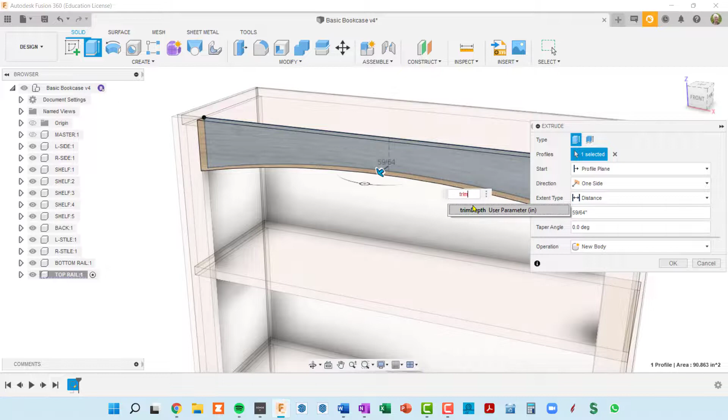All right, so I think we've got a fully defined sketch. Let's look at it. We've got all black lines. So we're ready to finish our sketch, and then we still see this construction line, but it's not getting in the way of this closed profile. So we're still able to extrude this piece. We'll go up to extrude. The arrow is pointing towards us, so we're going to type in a positive value, and this is going to be our trim depth, so it matches the thickness of the other pieces of trim. And there it is.

Now let's add our final component, a top that actually overhangs 3 of the sides of the case. I'm going to start by making sure I'm on the top level component and click on new component, and I'm just going to call this top. So our component has been created.

I'm going to go up to sketch, and click on this top shelf, and that's going to be our sketch plane. Let's look and see what we have here. We have the stile corner, we have the side corner. I think we're safe in this case to make a rectangle that coincides to these 2 points. So this is going to be pretty easy.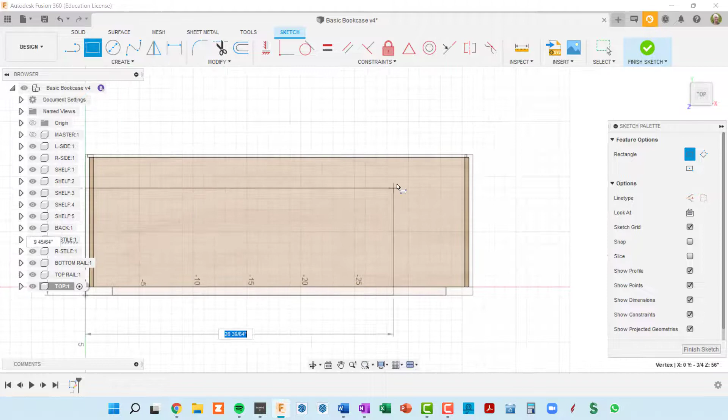We're going to click on rectangle, make sure we're snapping there, and we get the blue square. So I click there, move over here, I have my blue square, and I click again. Okay, so now we have a profile that should be in line with our case. It should be the case width and the case depth plus the depth of our stiles.

But we want it to overhang on 3 sides. We want it to be flush to the back and overhang on the other 3 sides. So let's look at this from the top view. I'll click on top in the view cube.

And let's use a new feature here, offset. So offset pulls up a dialog box and it allows us to select different lines and offset them. Now your dialog box may come up with chain selection on, and if it does, you'll see that all you can select here is the entire rectangle. So if I select one piece of it, I'm selecting all of it, and then when I offset, it's offsetting in all 4 directions. I do not want that.

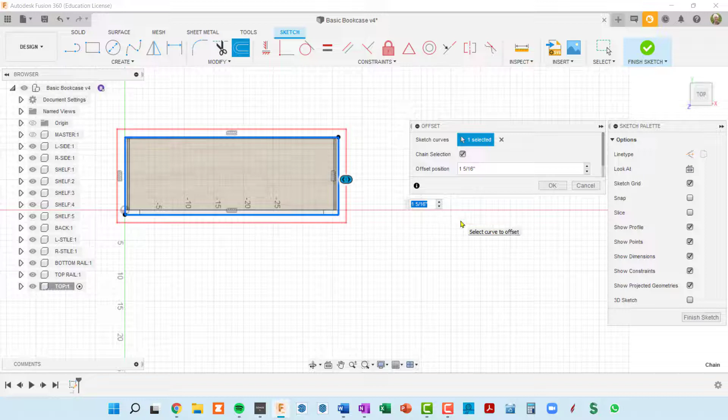So I'm going to hit Control Z. I'll go back into the offset tool, modify offset, and I'm going to make sure that chain selection is turned off. Now I can click on individual lines in my sketch. So I've got the front and the 2 sides. And now when I offset, I'll be able to drag out in the directions that I want only.

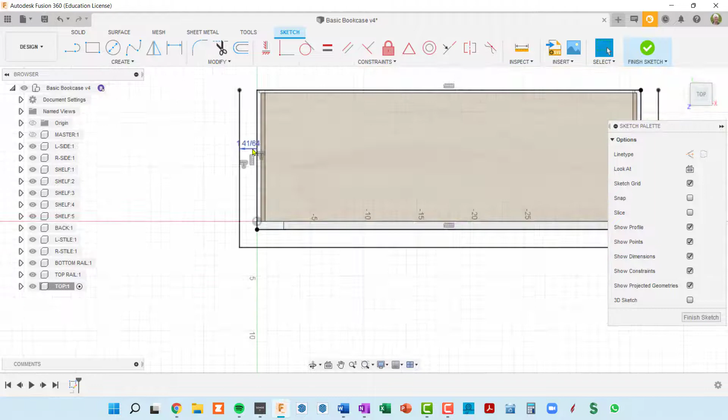But I want this as a parameter, this overhang as a parameter. So I'm going to go ahead and finish this initially, and then we're going to come back in and change this dimension to be a parameter. So let's make a new parameter and call it top overhang. I'm going to click on plus here, top overhang, and while we're at it, let's say that's going to be 2 inches.

While we're at it, let's also do a top thickness. So I'm going to click here, type in top depth, and come down to expression, and put that in initially as 3/4 inch. We may crank that up to 1 inch later. That's going to be our extrude distance. So I'll close the parameters.

We're still in our sketch, and I'm going to double click on this dimension, it's the dimension of the offset from the initial rectangle that we drew. And I'm going to type in top, and now I can pick top overhang out of this list and click enter, and you can see it's a formula, but it's initially 2 inches.

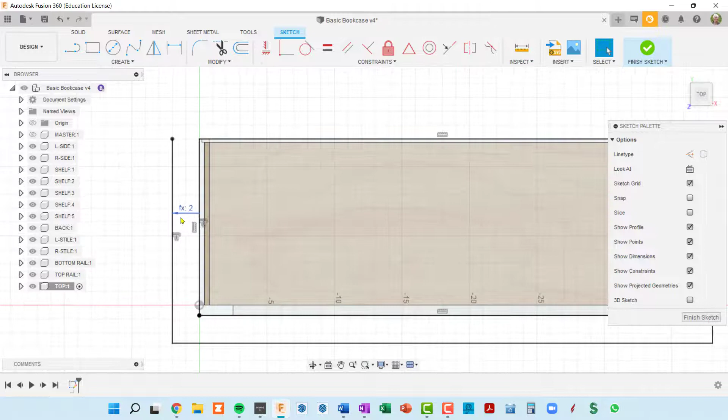Perfect. But we don't have a closed profile here. We have one here, but we don't have one out here. So we actually need a line from here to here. I'll go up to my line tool, click here so I'm coincident to that point, and click here, coincident there. And now we should be able to hover over. So if I hit escape to get out of the line tool, we can hover over this and pick these 2 surfaces.

Now, we're just going to do a 2-part extrude here. We're going to extrude this part and extrude this part to the same depth, so that'll give us one solid piece. So I'm going to finish the sketch. Here's our top with its overhang. I'll go to extrude, and now I'm going to pick 2 profiles. So in select, I pick this profile and then pick this profile, and we see that there are 2 selected in the dialog box.

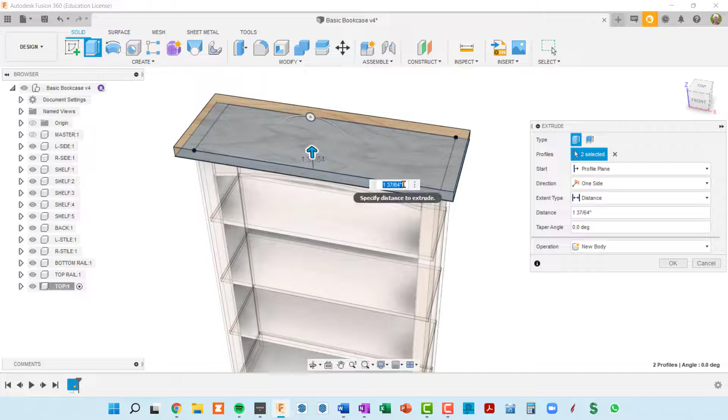Now I'm going to come upwards and create a new body, and I'm going to put in the thickness of that top. So if I type in top, I've got top depth, and I'll hit enter.

Taking a look at this, I think I'm going to change the top overhang—that looks a little beefy to me. So I hit Shift P, my shortcut key to get into the parameters list, go to top overhang, and set it to 1 inch. I'll click 1, enter, and OK. Coming back to the drawing, we'll see it's now overhung by 1 inch.

So that's the top, that was pretty darn easy. I'm going to go back and activate the top level component, click outside of it, back up, and take a look at our shelf.

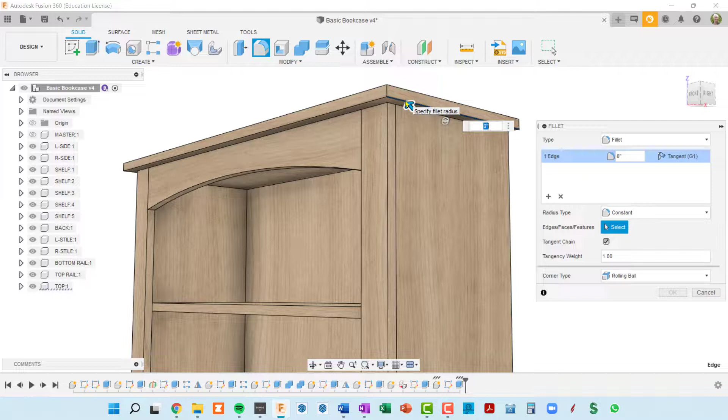Now I'm going to add some roundovers, starting with the top that we just made. I'll go to the Fillet tool, which is the same as roundover. All I need to do is select the various edges I want to fillet. I'm clicking on these edges, and I'll come around to this one—so I'm going to round over these three edges.

I've selected those three edges, and now the fillet dialog box wants to know the radius of the fillet. Let's try 1/4 inch and see what that looks like. That looks pretty good. But what if we want to change the thickness of the top?

Why don't we make something related to the thickness of the top? Our top thickness was top depth, so I'm typing in top and picking depth out of the list. You can see now the radius roundover is the entire depth. Let's say top depth divided by 2. Okay, that's kind of the look I'm going for.

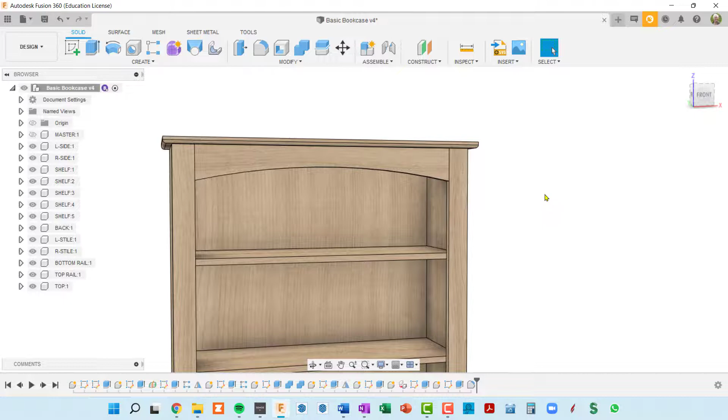Now let's see if that fillet adjusts itself when we go into the parameters and change the thickness of our top. I'm hitting Shift P, going down to top depth, and changing it from 3/4 to 1 inch, then clicking OK. Our top looks thicker, and the radius roundover did the right thing—it scaled itself up. There's no roundover on the back because that's flush to the back.

Okay, so that went well. Let's do the same approach on this arched rail and also on this bottom rail. We'll start down here. I'll go into the Fillet tool, click this edge, and we can actually do two members at once if we want the same fillet radius. So I'm going to click this edge too.

In this case, we have a trim thickness, so trim depth divided by 2 is going to be the radius of our roundover. Now that top piece is rounded and the bottom piece is rounded.

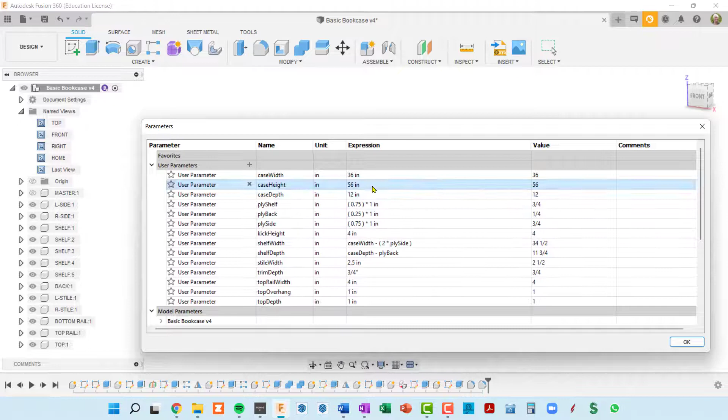One thing we currently don't have control over through our parameters is the number of shelves, and I'll demonstrate that. I'm going to go into our parameters, change the case height to say 100 inches, and close it down. You can see we've got this huge gap between our shelves, so I'd like to control that. But remember, we have dados that go up these side pieces and shelves, and we need to automatically calculate both of those. So it's going to require a little bit of work beyond just defining a parameter, but let's give it a shot.

So Shift P to get into our parameters, and plus to define a new parameter—I'm going to type in num shelves. Now, we've used inches as the unit for everything we've defined here; they've all been measurements up to this point. This is not really a measurement, just a number defining the number of shelves. So if I left this as inches, it would actually fail. I'm going to pick no units and put in an expression, starting at 5, which is the number we currently have, and OK.

So now how do we get this case to go back to use that parameter? Well, first let me restore that case—it just looks so odd to me. I'm going to go back and change this to our 56-inch height. Okay, that looks much better. All right, so let's think about this.

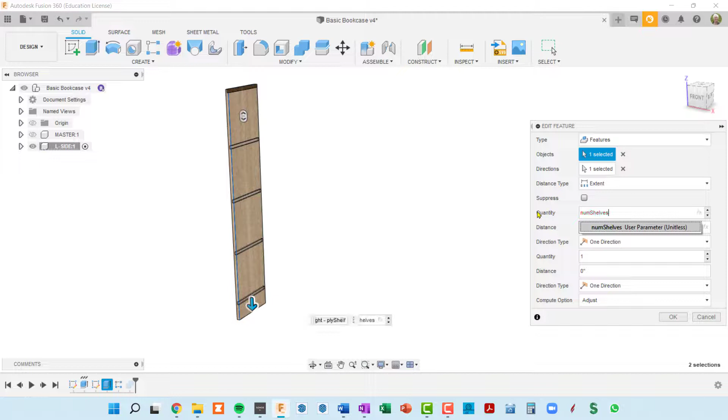So I'm going to right click on that feature and go up to Edit Feature, and the dialog box for that rectangular pattern is going to show up. And let's see, our quantity is just set to 5. So let's just simply change that to num shelves. And there it is on our list, so I can click on it. And then OK. Well, we didn't change anything because our parameter is still at 5. So let's change the parameter to, let's say 10 shelves.

OK. So now let's take a look. We have 10 dados. 1, 2, 3, 4, 5, 6, 7, 8, 9, 10, which is proper, but we have not updated the number of shelves that we have. So we also used a rectangular pattern to reproduce these shelves. And we did that when we were in the top level component because we wanted the shelf components that we were reproducing to be underneath the top level.

So let's activate the top level and look at its timeline and find all of the rectangular patterns that exist in there. So I see 2 of them. If I hover over this one, it highlights the dados. So that's the rectangular pattern that we just updated for the dados. It's not that one. If I move to the other rectangular pattern and move off of it, you'll see that it's highlighting the shelves. So that is indeed the feature we want to update.

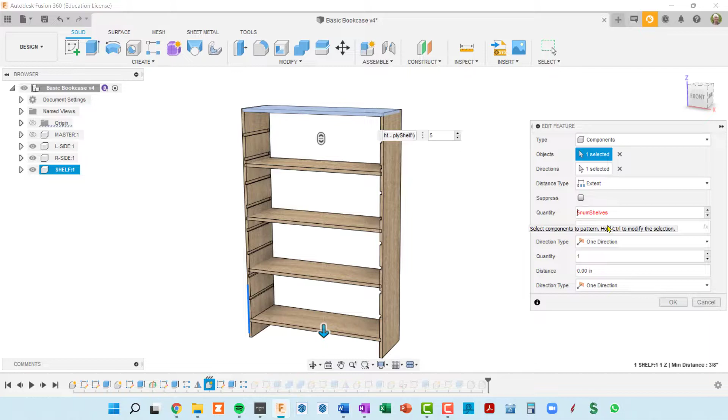So I'm going to right click, edit feature, and now here's our fixed quantity in the feature dialog box of 5. And again, we don't want that to be fixed. We want that to be our num shelves. There it is in the list. Oh, I've got a 5 in front of it. Okay. Now we see a preview. We're not done yet. We still have to click OK or press enter. But we see a preview of shelves that match the dados. So that's it. That's all we had to do.

Okay, so now that looks kind of funny, but let's go into our parameters and set that to something like 7. And take a look at our case, and it looks good. So we will be able to control that now, as well as the case width, depth, and height, and everything else takes care of itself. So let's just verify that we did all that right.

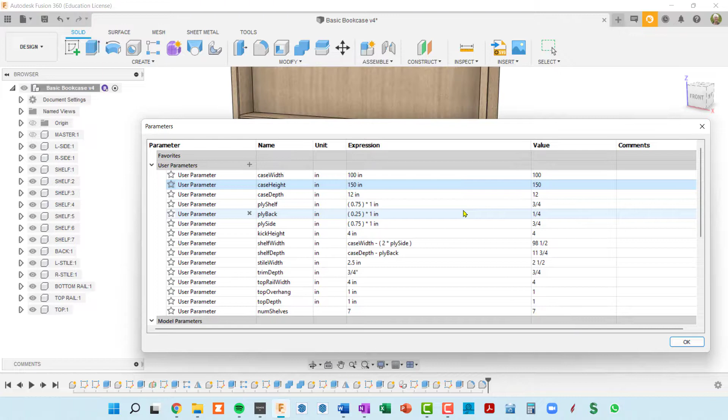So let's do a wide case width of 100 and take a look at things. All of our shelves scaled up. The top piece scaled up. The round over still looks good. It's an odd looking bookcase, but it works. Now let's go to say, I don't know, 150 inches in height, which is kind of ridiculous, but I'll close down parameters, and there it is. There's our super tall one.

Now let's add some shelves to that. And let's say we can go with 10 shelves there. So there are our shelves within our monstrous bookcase. And the last thing we want to check is the depth. Okay, so let's go to our case depth, set that to 24 instead of 12. And it looks like it worked.

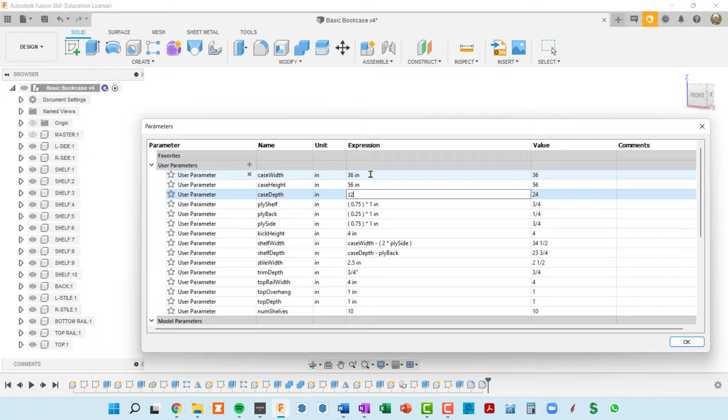So in something this big, we may want a bigger overhang, which we have a parameter for. We may want a bigger top rail, in width, which we have a parameter for. So we're in good shape to basically change this bookcase into any custom dimensions we want very easily. So let me just go back to our starting dimensions of 36 by 56 by 12. I'm just tabbing between the values here, and we'll do OK.

Now we have too many shelves, so I'm going to go back in, change that back to 5 shelves, and that's the original look of our bookcase. So that's it. That is a fully parametric drawing where all you need to do is change a few dimensions, and everything scales up appropriately. Joinery changes. So I hope you've enjoyed that.